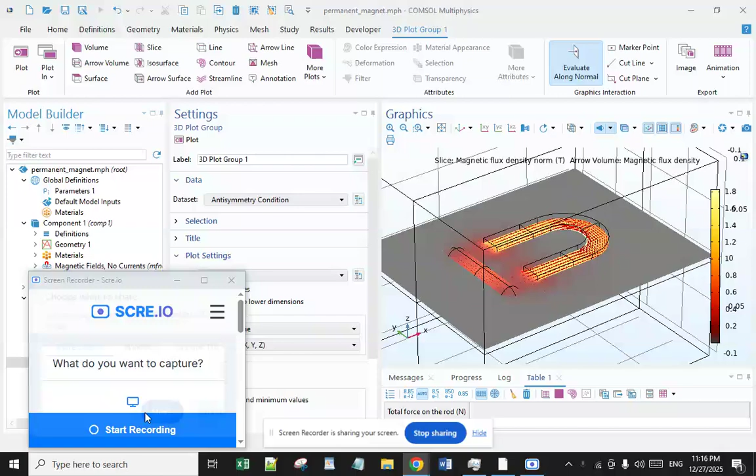In the name of Almighty God, I am Mahsa Sankoshi, and today I want to talk about permanent magnet.

A magnet is a material or object that produces a magnetic field. This magnetic field is invisible but is responsible for the most notable property of a magnet, a force that pulls on other ferromagnetic materials such as iron, steel, nickel, cobalt, etc., and attracts or repels other magnets.

A permanent magnet is an object made from a material that is magnetized and creates its own persistent magnetic field. An everyday example is a refrigerator magnet used to hold notes on a refrigerator door.

Materials that can be magnetized, which are also the ones that are strongly attracted to a magnet, are called ferromagnetic or ferrimagnetic. These include the elements iron, nickel, and cobalt, and their alloys.

Some alloys of rare earth metals and some naturally occurring minerals such as lodestone, ferromagnetic, and ferrimagnetic materials are the only ones attracted to a magnet strongly enough to be commonly considered magnetic. All other substances respond weakly to a magnetic field by one of several other types of magnetism.

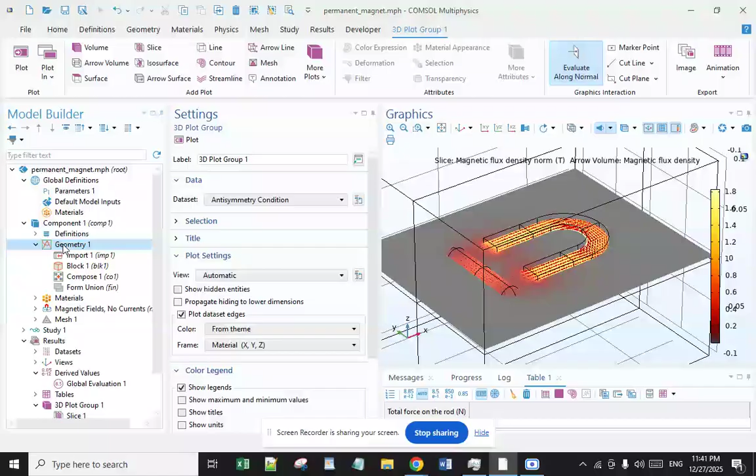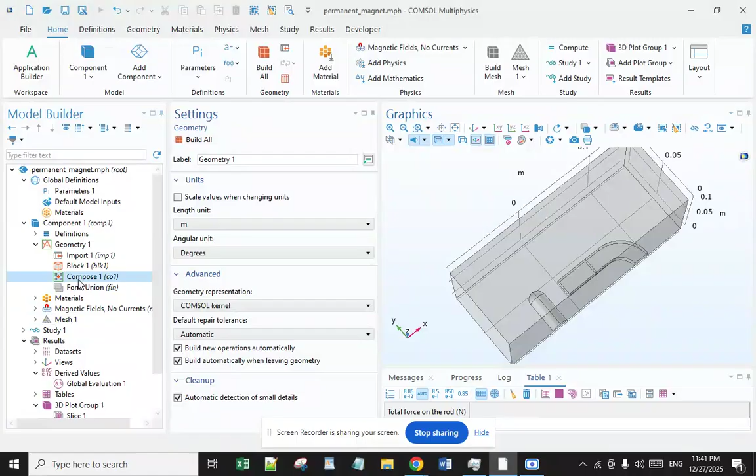And here we are, this is the COMSOL simulation, and you see our geometry. This geometry, I make it more transparent. So you see it's half of our geometry, and we can make it double. You see the materials we have used are iron and neodymium. This is the alloy of neodymium and iron.

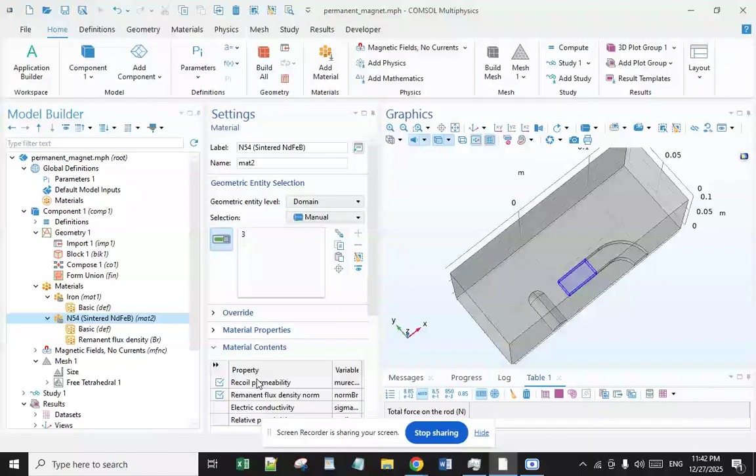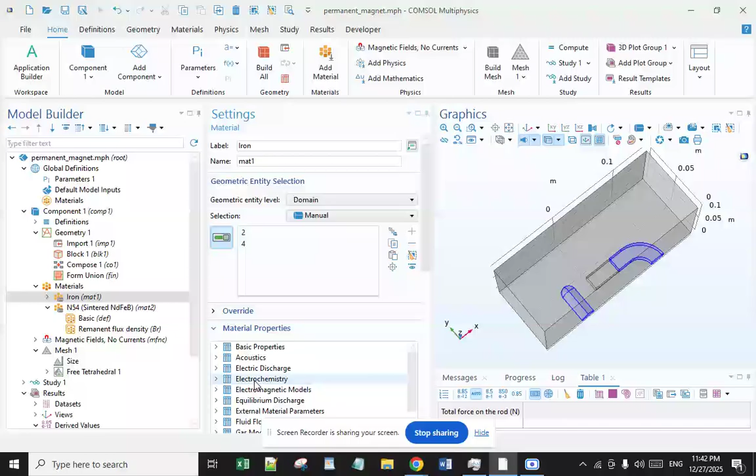It's a remnant flux density. The important things that we use are a recoil permeability, which is 1.05, and remnant flux density norm, and electric conductivity, and also relative permeability. And also for the iron material you see the relative permeability, and we have some other general properties, basic properties, etc.

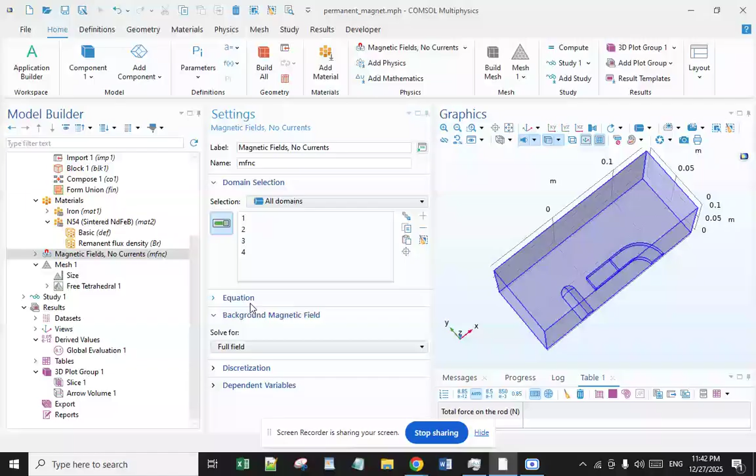We go through the magnetic fields as a physics module. The only physics module we have used is magnetic fields, no currents. All of the box and also the magnet have been selected, and the equation we have used is, as I have described, H is equal to minus del Vm. And also we assume that del · B is equal to 0.

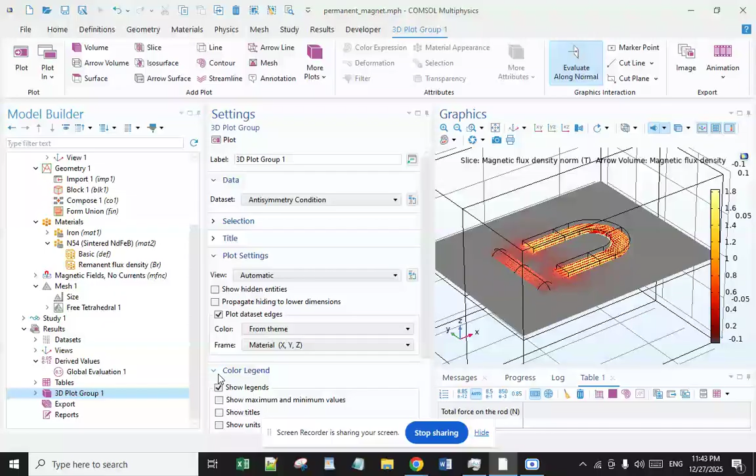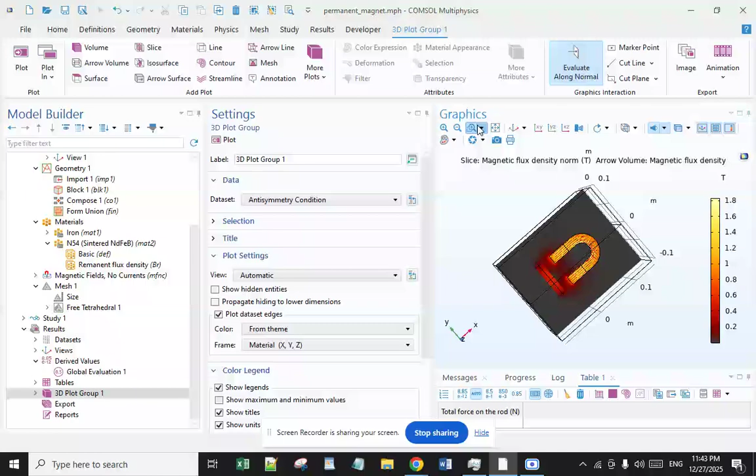And we see the three-dimensional plot group. It is the magnetic flux density norm. You see in our pole we have a higher magnetic field.